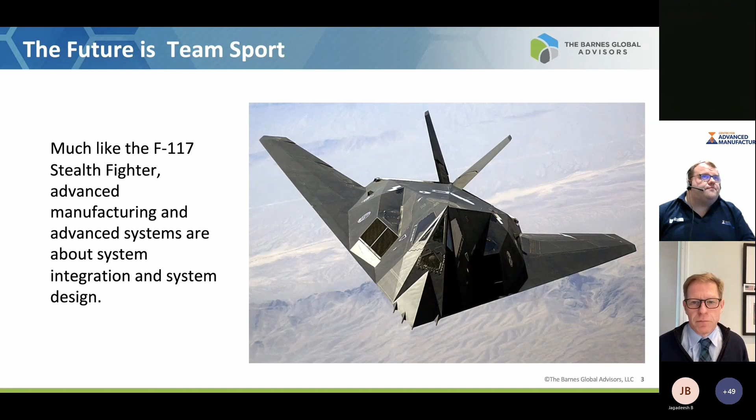So the future is a team sport. Much like the F-117 stealth fighter, advanced manufacturing and advanced systems are about system integration and system design. If you take the simple example of a powder bed fusion device, there's a lot going on in this machine. It's much more complicated than a sand casting. We're creating a material and a microstructure while we're creating the part. So there are a lot of things happening. You need a lot of interdisciplinary engineering happening there. So an integrated team - pretty much everything in the future I see as being team-based.

I made this analogy at the DfAM symposium, which personally I thought worked. The idea is that designing for additive is somewhat similar to being a chef. When I initially brought up this topic, a few people in my head - I've been watching The Bear, so I'm thinking, yeah, this is me.

I'm the Bear, I'm telling everybody what to do. We're grilling things over here, we're sautéing things over there. Naturally Gordon Ramsay - I thought hey, this is a good character. He's barking orders, he's telling everybody what to do, he's shouting at people. Some of my team maybe thought the British Baking Show was more my speed, and yet a few others brought up the chef from the Muppets.

So maybe with that as an entree, we'll keep going. If you take designing for additive as a team event, design teams are like chefs designing a meal - they don't design a single dish, they design an entire meal. You start with an empty plate. You may have a meat or a protein, but you'll probably have starches, vegetables. You may have multiple courses like a salad. All of us like a nice dessert, that's always good. And then all of that needs to be paired with what kind of beverage you're having. That is a meal - it's not just about cooking the steak.

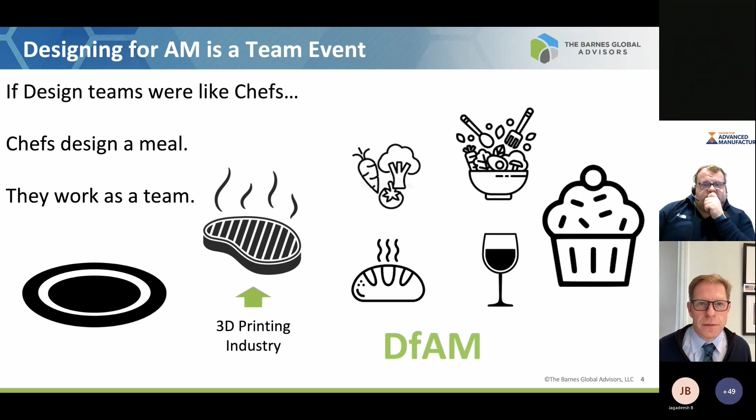And the reality is that chefs live with requirements - in some cases you'll have customers who are vegetarian, or can't have gluten, or cannot tolerate lactose. So you also can be constrained by the method - in this analogy, the manufacturing process, if you will. You may have an oven, you may have a grill, you may have an open flame. You need to adjust your desires to what you can practically make.

Just this morning there was a clever conversation happening between Mark Kirby and Duan on LinkedIn about microwaving a steak might not be the way to go. A microwave is a very useful tool if you wanted to heat up water and get it to boiling very quickly, but probably not the best choice if you wanted to cook a steak. So inadvertently, you guys did a fantastic job of making a point for me - kudos. But now when we talk about MFAM, we're talking about the restrictive side of things. You're constrained by what your customer wants, what you have as inputs, what you have as processing technologies available to you. Those start to put constraints on what you can do with the design.

So these things also need to be taken into account.

On the TBGA side, we look at designing for additive as MFAM plus DfAM. The designers have to balance the restrictive and opportunistic aspects of additive. A lot of times we're constrained by the additive process on the MFAM side, whereas on the DfAM piece, we're thinking more about the part. We've got great ideas about what we could do with this part, and we may have all kinds of opportunity there. It's just a way to break the problem up.

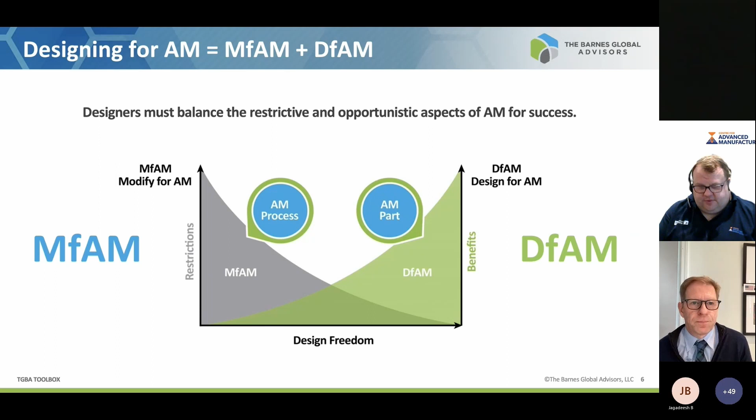So we talk a lot about requirements. Obviously there's a lot that goes into an AM process. This one's more or less honed in on powder bed fusion. We don't need to go through all of it, but there are requirements here, different things we need to take into account. We have a build layout, we have support structures, which could be structural or thermal, and design guidelines, what GD&T and features do we need to add, and the processing parameters dependent upon the material and the feedstock.

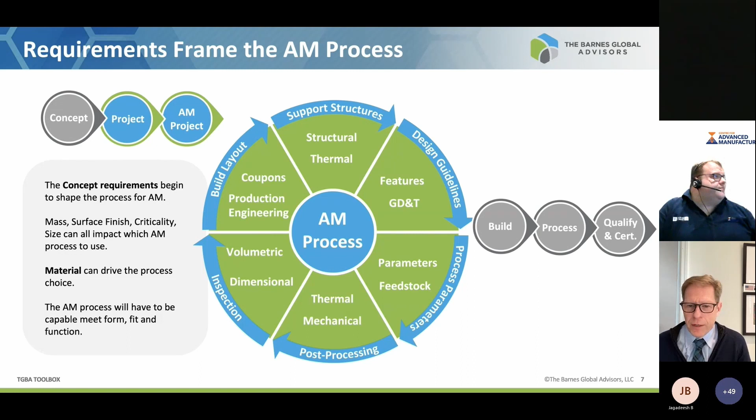All the post-processing, how are we going to heat treat when we're finished? Do we need to do mechanical processing? Do we need to do chemical processing? And then the last step is, how do we prove that we made what we said we were going to make? This is the volumetric and dimensional inspection processes. So just to give a flavor, for us, designing for additive has to leave the part ready to be bolted on, installed, ready for flight or whatever service it's going into.

Similarly, we've derived this maturity model approach. As you step up in product requirements, you have to increase the skills and knowledge to get you there. At level 0, this is the prototyping world, pre-production, you're testing out processes, testing out shapes. Requirements aren't too high, so the skills and knowledge, you're learning.

Then you get to level 1, we're talking about production influence. We're not making the part with additive, we're maybe making the tooling, or making a shop aid that is influencing the actual part. But we're increasing our knowledge, increasing our MFAM ability, we have to start tracking the tooling, etc. And that leaves us at a little bit higher level than we were at.

Then we get to level 2. This is the most disdainful place to be, where everybody just wants to make the same part that they've been making, largely optimized for some other manufacturing process. Most of us have lived this existence and have scars to show from it. Sometimes you're stuck here because, for example, if it's a spare part, you don't have the ability to redesign it. You're living with the reality that it needs to look like the part it's there to replace. So this is really heavily MFAM. You're in the restrictive space, but we've made a big jump from the previous level. We need specifications, materials database, etc.

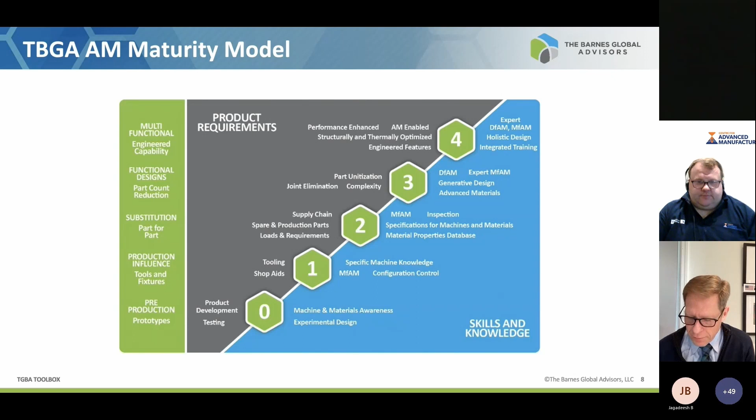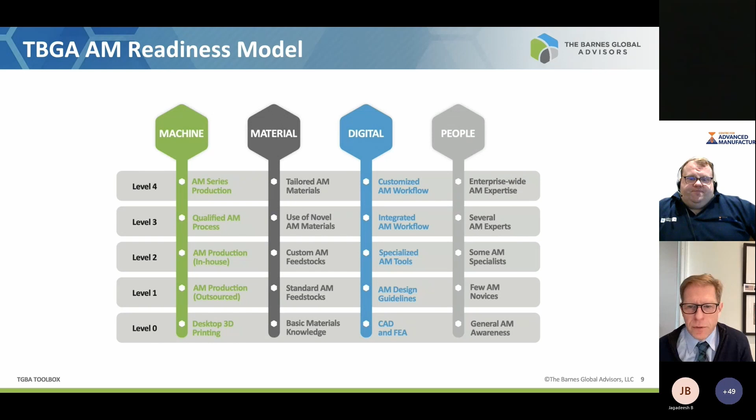Similarly, we talk about the readiness model. We divide this world up into four segments: the machine, materials, digital, and people side of things. As you're progressing in the maturity model, you really can't get there if you're mismatched in one of these categories. Not saying you need to be at the same level for all of them, but it's going to ease your path into it, and it's just something to take into account.

So what we're going to talk about is Metal Powder Works, and what is Metal Powder Works.

So with that menu to digest, see what I did there? Chef analogy.

We want to talk about the world of powders. Metal Powder Works has invented a new process. It's a very different way of manufacturing metal powders. It's not atomization. Modern day atomization has been around for about 90 years.

It's pretty leaned out. Metal Powder Works is inherently lower cost. It's more sustainable. We have very low CO2 emissions, much different than atomizing. We can produce high quality, very consistent powder. It's a very high yield process, typically 95% size yield efficiency. Can be safer because you can match the rate of production. It's a continuous process, so you can match the rate of production to consumption.

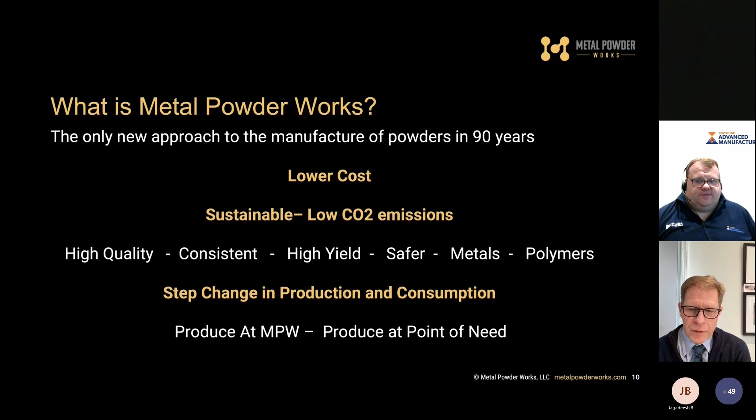And it can do metals and polymers. We're pursuing metals at this point in time. We named the company when we were only looking at doing metals, and later learned that we can also process polymers. What we're talking about is a step change in production and consumption. We can produce at our facility, and we can also produce at the point of need. We'll run through some of these examples.

So what do we sell? Metal powders today, mostly aluminum and copper product. We've recently announced at Formnext this partnership with Team Aero, the Australian race car team. These are two components that go into the steering housing, 50% lighter than what was there previously. We're showing that our technology, through a powder bed fusion printer, thanks to the fine folks at Beehive 3D, printed this at the former Volunteer Aero facility.

We printed our powder in conjunction with HRL, using the 7000 series aluminum powder. HRL coated it with their inoculant, Beehive printed it, and now these parts are being installed and running on the car. So with this, we're showing that the powder can in fact be printed. It doesn't necessarily look like atomized powder. Usually we get a lot of comments around the sphericity, etc., but we'll cover that in a second.

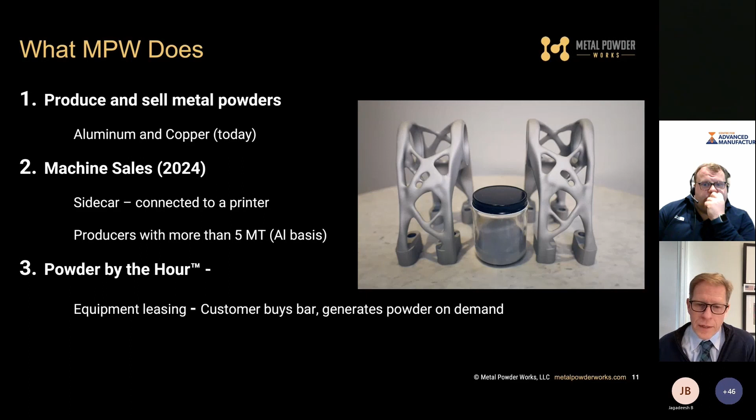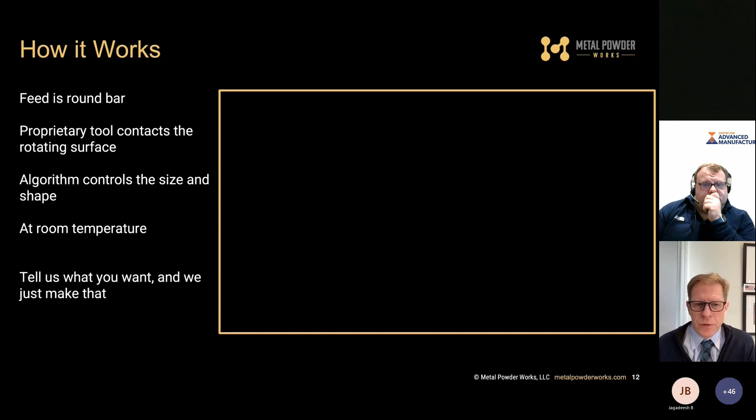So how does the process work? We use a round bar as a feedstock. We have a proprietary tool that contacts the rotating surface. Our algorithm controls the size and the shape, and it's all achieved at room temperature. Basically, if atomizing is producing a mound of powder and then you sift through it and mine out the bins that are interesting from a size standpoint, in this instance, you tell us what you want and we just make that.

So with that, we'll see if this video works.

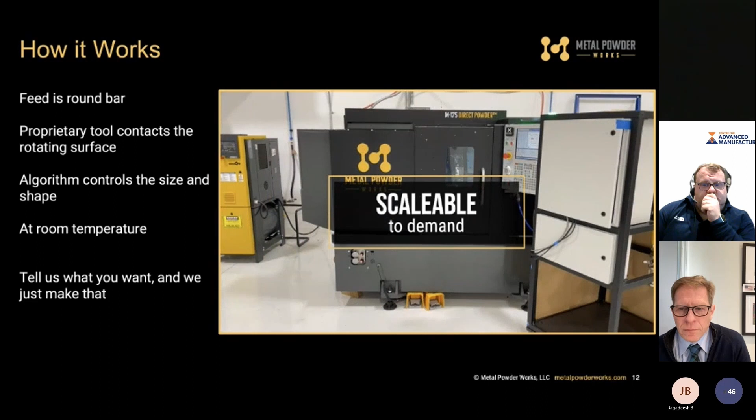So there you have it. You saw the powder being collected. That happens at room temperature. It happens in real time. It's continuous. And what you would have seen in that collection system is after it's run through a check sieve, it is basically ready to go.

The equipment, we're in the process of improving the production configuration of it. So what you see there is a slightly earlier version of it. With our process, we can tailor the size and the shape of the powder through our numerically driven process and through the tooling geometry that we choose.

Typically, we have been producing what we call equiaxed particles, a little bit prismatic, but we've also produced platelets and some high aspect ratio material along the way. If you run the product through a spheroidizer, you also get nice round particles. So that's also a potential output of our process.

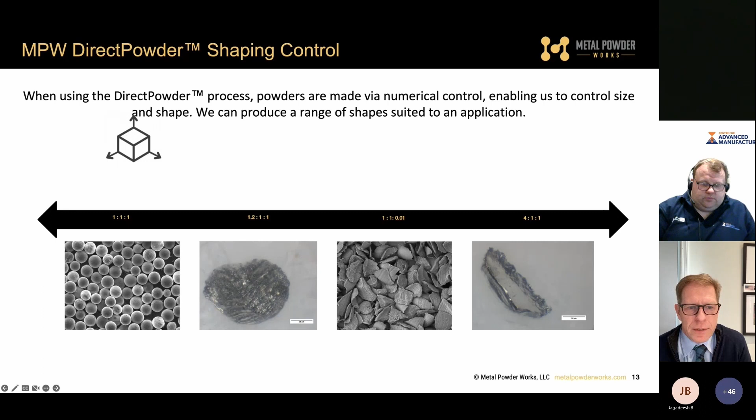As we all know, different processes actually desire slightly different things. Typically the size differs a little bit, depending on what you want out of the final part. The ability for different processes to handle different sphericity—sphericity is a range, it is not a binary, you are not spherical or non-spherical. It's simply a continuity description, and different processes can tolerate different levels of sphericity.

I did a simple category here. If atomizing, typically you can produce a 0.9 sphericity, but the yield can be quite variable, from as little as 30% to as high as 60%, based on the process you might be going into. There are certain materials, titanium, Ti-64 being one of them, where there's only a need for powders in that 15 to 45, 20 to 63 range, which is about 40% of the yield—meaning we're lumping all the cost of production onto less than 50% of what we make. That's a commercial inhibition to titanium taking off as a material of choice.

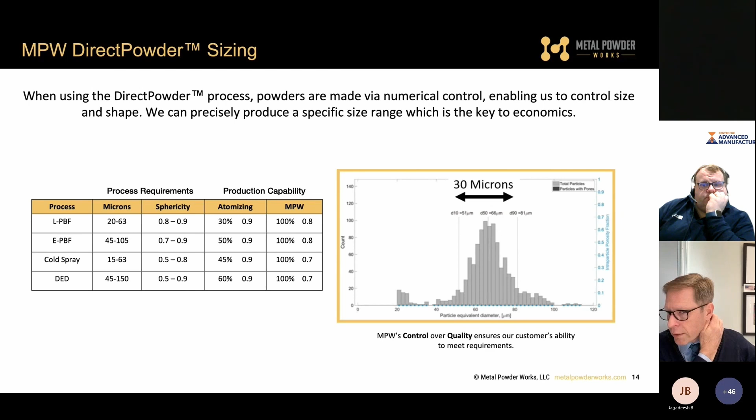Through our process, we can tailor the size and get nearly 100% conversion efficiency. The sphericity, we can match a little bit to the desired piece of the process. Our powder size distribution is nominally 30 microns, so we can take in a customer requirement—we look at a D50, and then we can shift that up or down based on the requirement. So you can see this is where we get the size efficiency.

So the powder by the hour—this is a step change, a concept you were looking at. The idea is that we set our machine down at somebody's site, they feed it with bar stock. Bar stock for 7075 material goes for about $13 a kilogram. You can produce atomized powder for less than $60 a kilogram through that process.

Now, whether that goes into a DED machine or cold spray or other printers, whether it's feeding a spheroidizer, at some level we don't care—we can match to the input that's necessary. So theoretically now you can have powder production going from bar stock in, to part or spherical powder out, effectively in a very linear and continuous process.

We have signed a couple of cooperation agreements with SPEE3D and Formalloy around this concept. So, not exclusive, but with those machines, you could sit our powder generator next to it and feed it on a continuous basis.

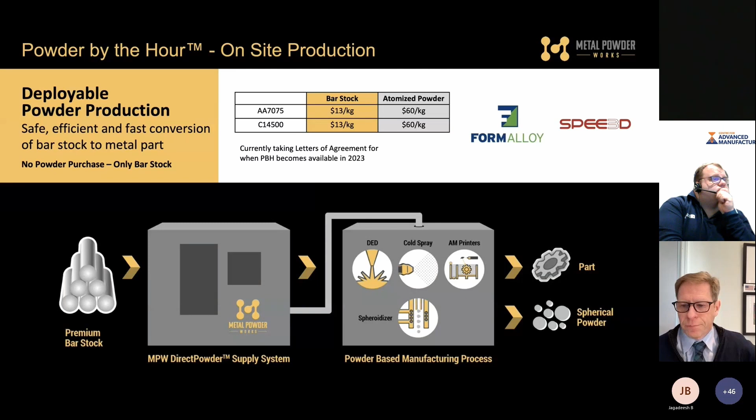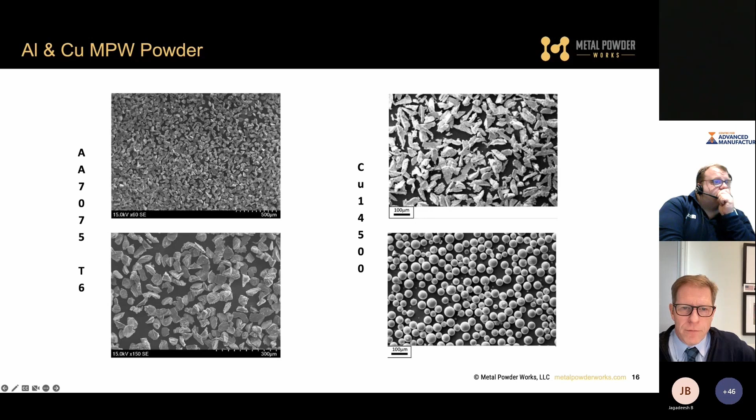Our aluminum and copper powder—here's what it looks like, this prismoidal type shape. This can be further optimized. Here's another example where we took the copper material and ran it through a spheroidizer in concert with 6K, getting a nice controllable spherical particle out of it. If you desire spherical particles, that's a possibility.

We've certainly shown that it produces good prints in conventional processing through binder jetting and powder bed fusion without it, but we're certainly conscious that for the last decade we've been telling people that spherical particles are essential. And now some of the evidence is showing that maybe spherical-like particles are just helpful. So we'll talk about that.

Really, I think what we're looking at is that it's important to get to a certain bulk density in the powder bed—beyond that, we're feeding a weld pool. Tap density is interesting, so these are some of the measured values that we have. It kind of goes back to the previous discussion about the rotating drum. The rotating drum is more suitable for a powder bed or binder jetting environment than the Hall flow is, because rarely do you have an instance where you're flowing powders through a circular orifice, specifically a very small circular orifice. So it's a proxy for what we want, which is powder movement.

If we look at—we've done some CT work with the University of Pittsburgh, so we've taken our powders and we've also spheroidized them.

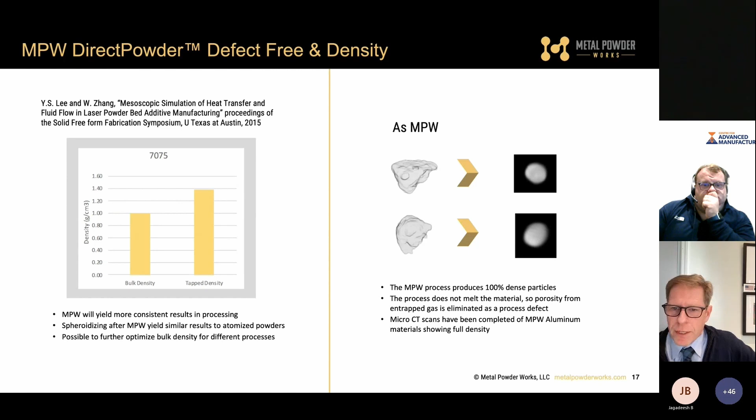What you don't see here, because you can see straight through it, is that we don't have any defects. We convert effectively whatever the bar stock material is. We retain the microstructure, the heat treat or temper of the bar stock into the powder, because we don't really introduce any heat into the product. There's no melting; we don't change the state of matter. So it's a very interesting process from that standpoint.

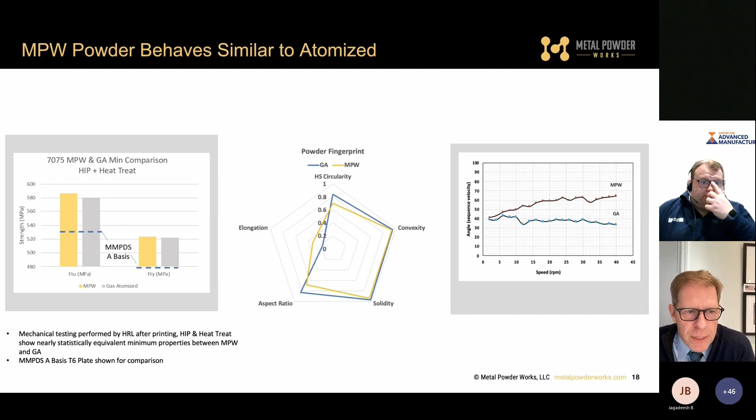We've done some comparisons with Purdue University on different things. On our first chart, we looked at printing a 7000 series aluminum, starting with 7075. We added the HIP process to both materials. Gold is the Metal Powder Works powder, gray is the gas atomized powder, and effectively you get the same properties back out. I could say Metal Powder Works is slightly higher, but we're talking single-digit megapascals. If you compare this to 7075 plate out of MMPDS on an A basis, minimums to minimums, we are exceeding the minimum for 7075. So this is very promising.

If you look at the center picture, this is just a powder fingerprint that Purdue looks at. At the bottom line, the blue lines and the gold lines are pretty much the same. It's not identical, but it processes basically the same in a lot of different metrics. On the right, we show the rotating drum, and we see some separation as we move to higher rotating speeds, which would be akin to a recoater blade. But with feedback we've gotten from some people, we found that the faster we recoat, the better performance we got. The bottom line with this graph is that 20 degrees of difference really isn't meaningful in terms of powder behavior. It is academically different, but maybe not meaningful.

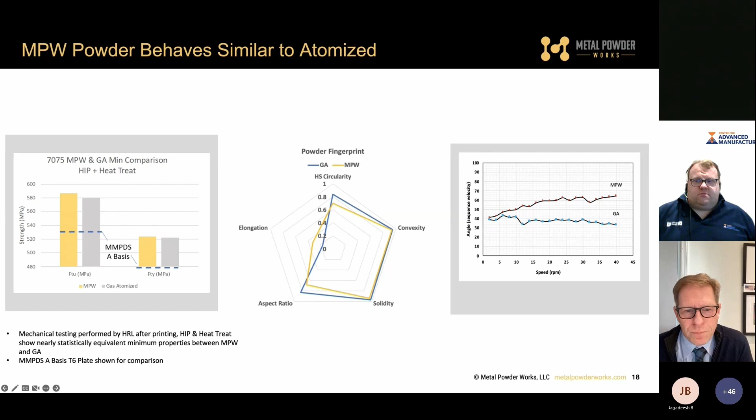So we've done some testing in a lot of different processes. Here's that solar car part in a powder bed fusion. We've done the aluminum material in three different styles of printers: EOS, 3D Systems, and Renishaw.

We did some work with Illinois Tech, so they've done binder jetting of our copper powder, and you can kind of see here what it looks like. We are doing copper printing with powder bed currently with University of Waterloo. I've got a couple slides here in a little bit.

We've done some cold spray work of both copper and aluminum, and you can kind of see the adhesion interface that we get. So we're working to dial this in. We're now giving the cold spray people more degrees of freedom. We can tailor the hardness of the powder through heat treatment, and that controls the deformation behavior.

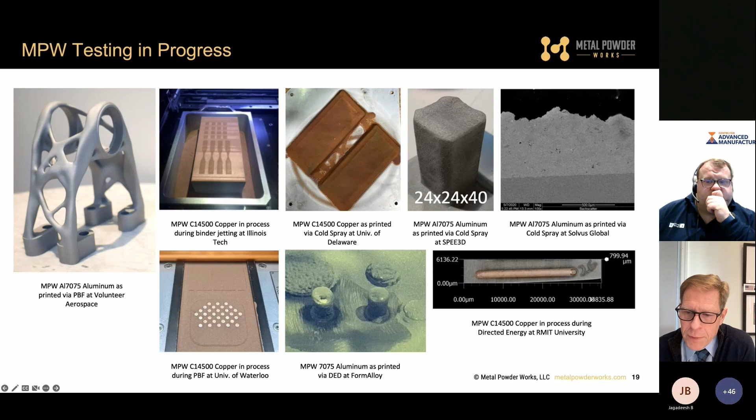We've also done some DED work with the FormAlloy process. Some preliminary work here shows that the powder moves through the process fine. We've got some copper work done at RMIT University on a Trumpf system. We're getting ready to do some work with NASA on an RPMI system in concert with Elementum 3D.

What was really interesting is work we've been doing with MSAM at University of Waterloo. Copper, as you know, is a highly reflective material. What we found was that we've been able to get to high density, 99.9 density, but at 40% less power, simply because more of the laser power is absorbed by the particle. It's not reflecting off because we're not making a shiny round sphere. This means you will see less evaporation inside the chamber, less residual stress in the parts, and from a macroeconomic standpoint, it means more of the conventional metal printers out there can process copper. We're just using a regular laser, not a green laser or blue laser or anything like that. We've basically designed a particle that helps the process using laser light.

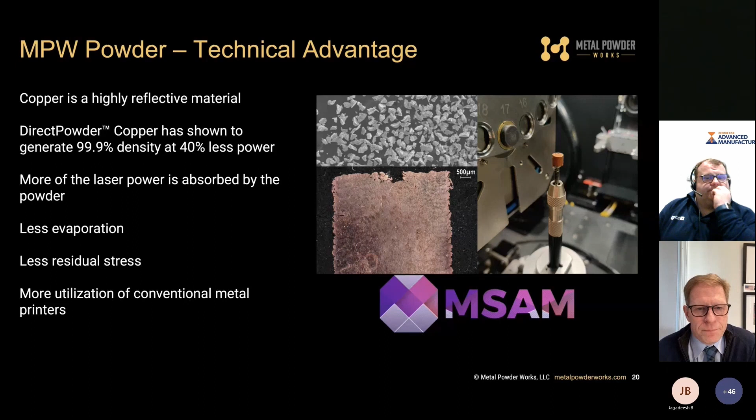We've also done a life cycle assessment, and what we found was that our process emits almost 80 to 90% less CO2 than gas or water atomization. We think this is really interesting and very meaningful. We don't use a lot of energy in our process, and we don't emit hardly any CO2 emissions. When we switch over to the use of a renewable energy source, because primarily the only source of CO2 emissions we consume is electricity, we can improve that by as much as 97%.

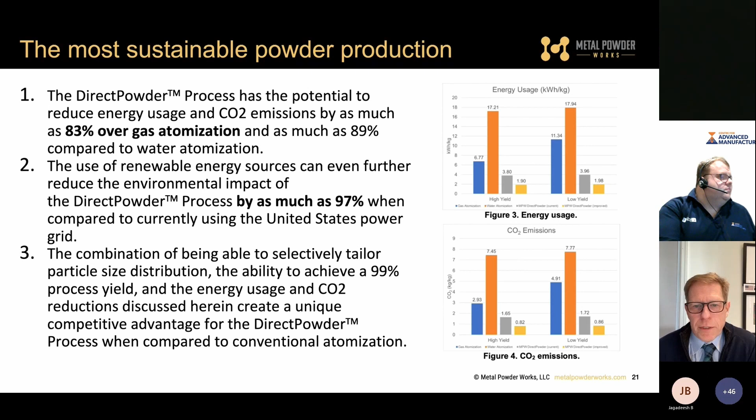So we have a highly efficient, highly sustainable powder production method. As a company, we are moving into a production mode in a production facility. Our new production facility is here in Pittsburgh, Pennsylvania, at Neighborhood 91, which is the additive manufacturing production campus near the Pittsburgh airport. We are in with a host of other companies that are making parts using additive manufacturing. This is a production campus focus.

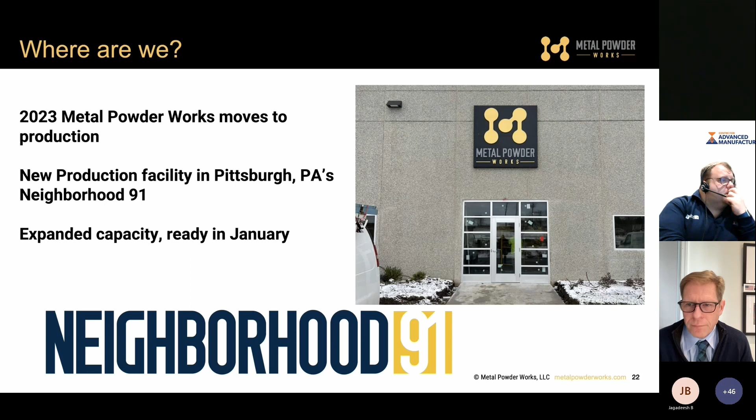If you're putting this all in context, so why are we, beyond that we've got a new process, which is certainly interesting, why does it matter? I mean, why did we do it?

So if you look and you're interested in powder fed systems, macroeconomics, the metal powder market is a $14 billion market. It's not growing very much. The only growth is in additive manufacturing. The metal AM market is about $2 billion, the metal additive powder market is around about 600 million, could be up to 800 million this year. That market is really the only thing that's growing within this metal powder market. So it's very interesting that that's the case.

95% of the metal powder market is water atomized currently. Additive manufacturing uses 0% water atomized powder. So it means that we're only utilizing 5% of the installed capacity. At some point, this is going to restrict the growth of additive manufacturing if this were to continue.

Most of the materials that are of interest to additive manufacturing are maybe different than what the metal powder market grew up with. So it's a lot of stainless steel. There's some Inconel 718 out there. There's some other materials, but we need to see more materials if additive manufacturing is going to really grow as everybody expects it. This is the problem, which is it's hard for it to grow when you get low yield out of the size fractions that's necessary for additive.

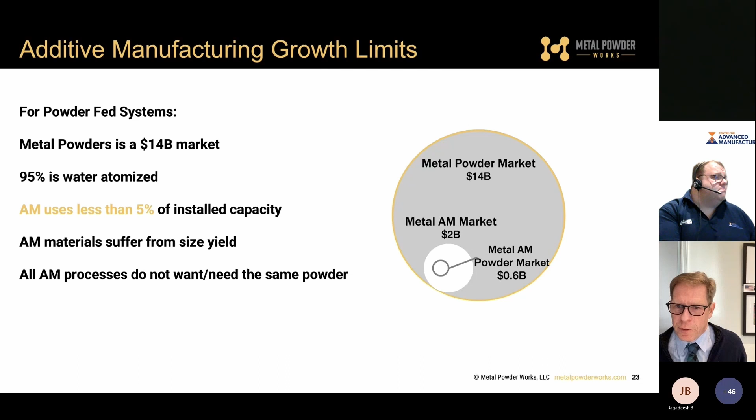Also, all additive processes don't want or need the same powder. So we talk about these different additive processes. Largely, we talk about additive as if all processes are the same, which they aren't. It's a pretty diverse space at this point. I'll get to a bit more of that in a second.

So, when we talk about spherical and non-spherical, I think we're starting to overcome the desire that super spherical is really desirable, because now we're seeing that denudation actually impacts the ability for us to retain some tolerances and surface finish. And so denudation simply is, think of it simply that if it took very little energy to get the powder into position, which we all like, it also means that it takes very little energy to get it right back out of position.

In any additive process, you're putting a force on that powder. So as it's sitting in a bed and the laser is moving around it, the laser is exerting a force on the powder. This feeds the technical term of denudation, which is the powder moving. So it's no longer where you want it to be. It's partially the reason why we see spatter in some of these processes.

In binder jetting, it's still an effect. We did some work with Carnegie Mellon years ago where we were able to visualize the impact of the binder. The binder droplet is coming down on that surface at 8 meters per second. And if you have a highly flowing powder, it's basically like a small bomb detonating every time the binder comes down. So you're displacing the powder as the binder impacts the surface.

So what you really want is powder that has good movement, but not the most movement. And so what you want it to do is get into a bed and kind of situate, and so then it resists the energy from the laser, from the E-beam, from the binder, or whatever the source of energy might be.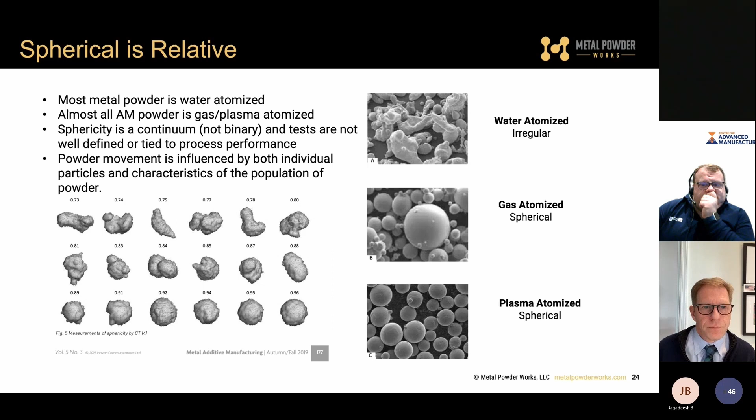If we look at the end use, some work done by Barnes Global Advisors shows that really what you need to look at here is that we're growing from about 24% in additive manufacturing to about 44% estimated by 2029. So again, the growth is going to come from additive manufacturing, not so much from the other powder consuming technologies like MIM, powder metallurgy, etc.

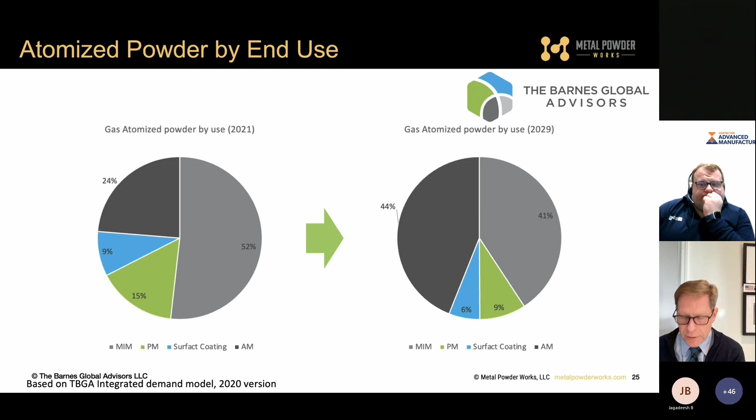If we talk about why this matters, as the printers get more productive, the part cost decreases, but the percent that powder represents grows. So unless we improve the productivity to manufacture powder, this situation would be true. A couple years ago, let's say the powder's $150 a kilogram and doesn't change over time. Two years ago, the powder's roughly 8% of the cost.

This goes to the specific part here. Most of the cost was tied up in the print and then the post processing. Today, because the printers are becoming more productive, we're seeing that the printing cost is decreasing and the post process as a function of the whole is increasing, and also the materials have increased because those other two things haven't changed, whereas the printer has improved. Now, if we fast forward to thicker layers and further compressing and improving the productivity of the printer, we see that cost continuously shrinking. So we could see the powder be as much as 34% of a printed part.

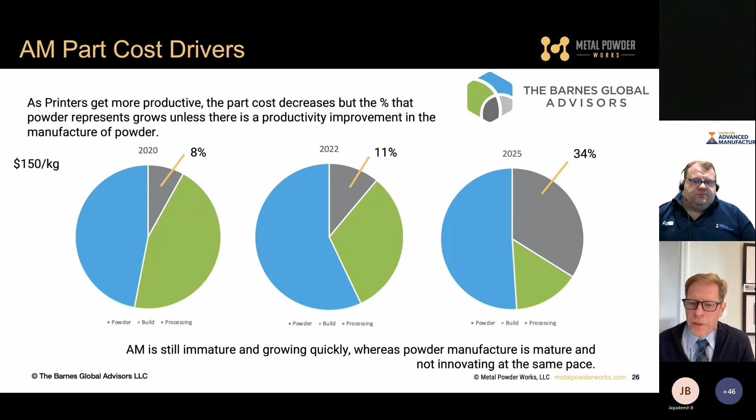Now more pressure is going to be exerted on people to figure out how we're going to improve that situation. This chart, also done by TBGA, predicts that in the short term, there's going to be a crossover between demand and supply. And if the capacity doesn't increase, typically we all know what happens with supply and demand when the supply is low and demand is high. So this is not going to help us in the future. It kind of goes back to that original comment that if additive persists in only using atomization, it's really limiting its own growth, because it's going to take a lot of funding to start punching out more atomizers.

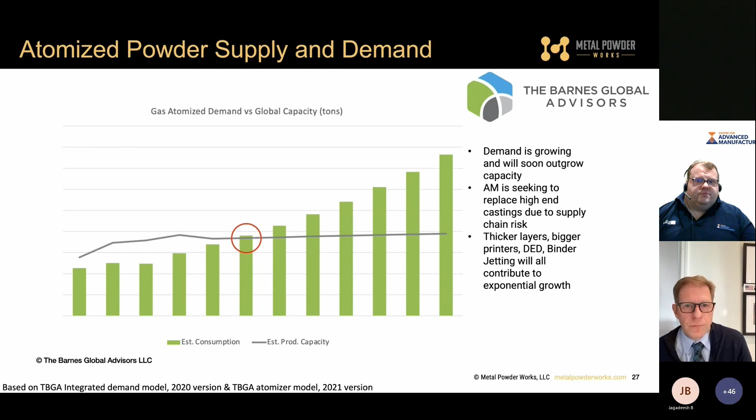Something else to think about. So we did a quick, kind of simplistic exercise. If you think about bringing it back to the theme of our topic today, design for the AM process with an impact on materials, we think about qualification of new materials. Again, qualification requires repeatable and reproducible processes. Stability and consistency in the material feedstock is critical.

Today, there are only 16 released AMS specifications for powder. That means there are less than 16 alloys for additive to use if they're going to be qualified through an AMS specification. However, there are over 2,000 released specifications for bar stock. So right there, we believe that Metal Powder Works can improve the number of materials that are available, because the ability for us to qualify powder should be very high. We start with a qualified, certified bar stock that has a specification. We're not melting it, we're not changing the state of matter, it's a continuous process. So we can create a specification around that, and we can meet most of the AMS specifications, by and large. They don't specify that you have to melt the material to create powder, but we need more specifications for powder. That's the bottom line.

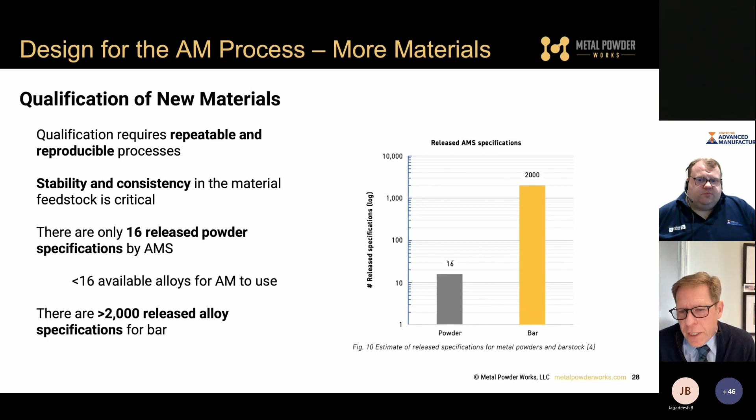So if we think about designing for the process, do all processes want the same shape, size, and condition? Simply thinking, if you look at any powder bed fusion process, we need to get the powder into position, i.e. the bed. The bed needs to be some minimum density, so that if we create a weld pool, we can feed it and get high density.

And it needs to absorb energy efficiently. We need not to reflect the laser light away, because, again, thinking as a materials engineer, if you're dumping more and more energy into my material just to get it to absorb the heat and melt, then once it's liquid, you're going to drive off, ruin my metallurgy that we've taken great pains to give you. And then you're going to create additional residual stress considerations.

On the cold spray side of things, what you're really interested in is consistent deformation behavior by the powder. And so our ability to retain a temper or heat treatment on the powder would be central to being able to certify a structural repair.

Certifying a structural repair in an atomized powder that hasn't been heat treated, because that aluminum, for example, will just continuously age at room temperature. So your performance is then changing, week by week.

On directed energy deposition, we talk about powder flow via forced gas, so it's a very different situation than everywhere else. Similar to cold spray, which actually doesn't desire a spherical powder in the first place. For DED, the ability to control size almost ties to surface finish pretty directly, but you need consistency for this material delivery. And then I call it sinter-based rather than specifically binder jetting.

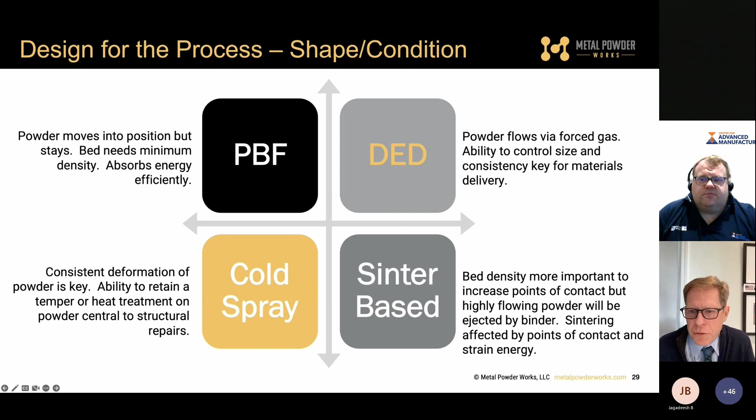So any of the technologies that derive their density from sintering, having multiple points of contact is desirable. Our process, because we mechanically drive the powder, we have high strain energy surfaces. Theoretically, those should give you a lower sintering temperature. So there's hope that having multiple points of contact creates multiple sintering initiation points.

And that's what I have for you. So hopefully my chef analogy was appetizing and entertaining, if nothing else. With that, I'm happy to take any questions that there might be.